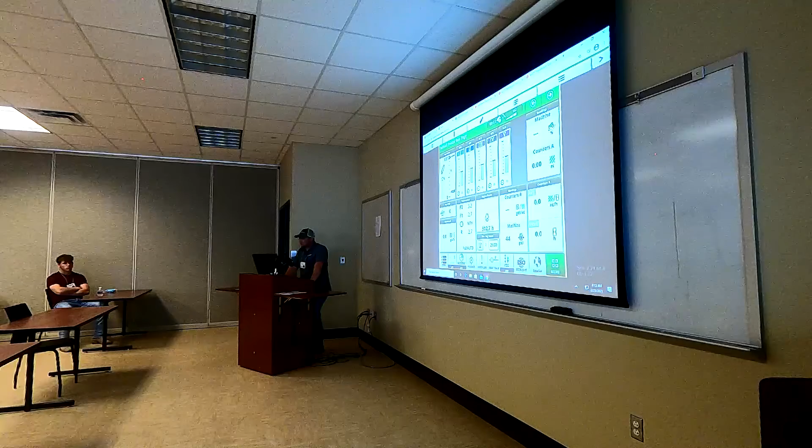So this is going to be our main run screen, and this is what you're typically going to see. This is completely customizable - you can change any of this layout, different readings you want to see, counters, all that can be customized in the layout manager, and we'll discuss that a little while later. So this is our main screen.

This is your quick little toolbar down here, and again, you can completely set this up to see whatever you need handy at your fingertips.

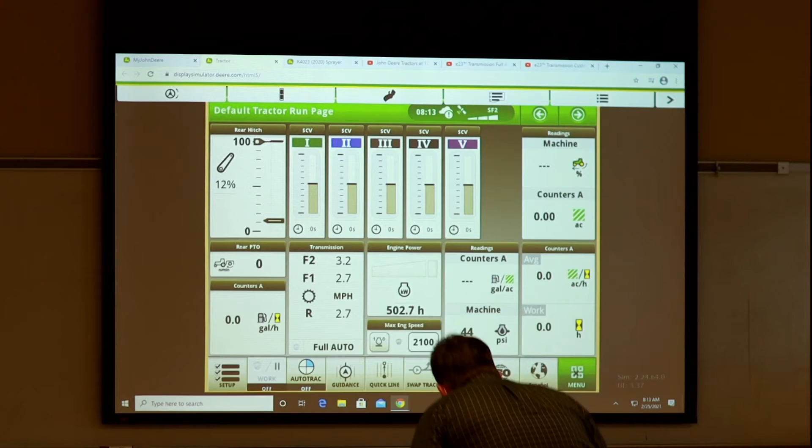Going into our menu here, this is going to be all of our typical machine settings, and this is what we're going to be covering in this presentation today.

Audio, of course, that's all going to be right at your fingertips. You don't have to reach up to your radio anymore - it's all right here.

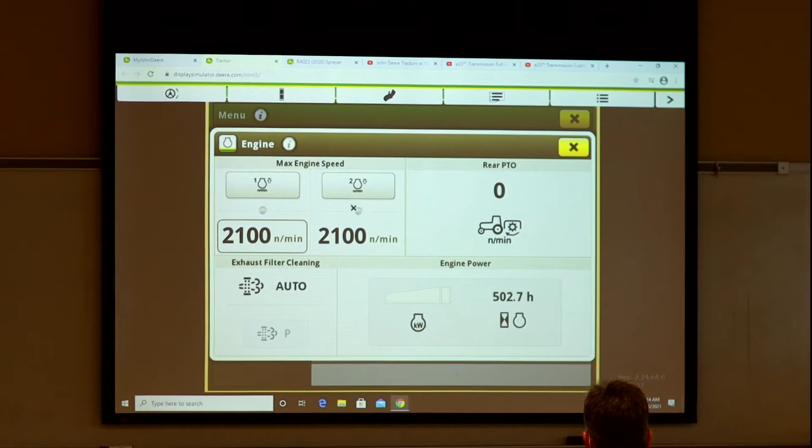Engine settings - this is where we can go in and set upper engine limit, basically a field cruise. You can set up to 2 of these, 1 and 2, and adjust your RPM range however you like, and have both of those preset. Those can be turned on and off on your throttle right here.

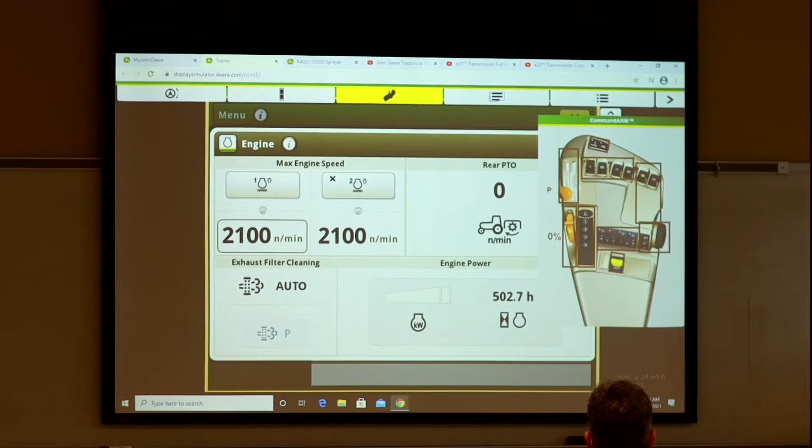So we'll go back. HVAC, all your air conditioning settings is included in this as well. Lights - all of your lights, you can select what lights you want on in each position.

1, 2, high beams, number 2, and you can also set a delay. The typical delay default is 90 seconds. We can set them at instant off when you get out of that tractor cab. I think it goes up to 5 minutes, giving you enough time to shut down the tractor, close up your shop, lock the gate, whatever, and have a little light to get in your truck and head home.

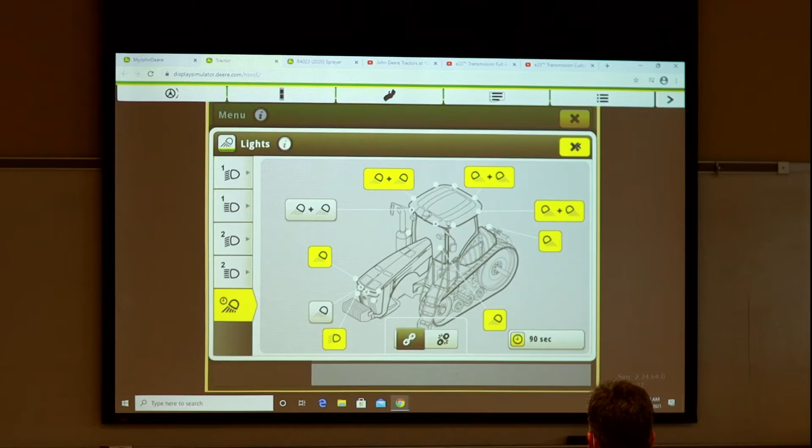Maintenance and calibrations - I'll get into this a little more. I've got a sprayer simulator I'll pull up. There's not a whole lot in here on the tractor side, but when you get into the sprayers and combines, this is loaded, and this is where all your calibrations will be stored.

Service intervals as well - you can now customize your service intervals. Instead of the light coming on telling you 50 hours of service, you can actually go in and add service intervals, name them however you like, and also put in notes. So say at 2,000 hours you changed the oil in your front axle and your hubs, you can make a note in there, and it stores it in the computer. So keeping a notebook inside the armrest - all that can be customized and set up inside here instead.

Phone for the Bluetooth radio, that's accessed through the Gen 4 display as well. PTO settings - not a whole lot in here.

Something I did want to point out, let's go to our transmission settings. This is an IVT transmission that this simulator is set up on. We do have a 6230R and an 8230R set up outside - I think the 8R has a power shift transmission, but the 6R does have an IVT transmission. So this is your typical transmission layout for an IVT transmission. I think most everyone's familiar with that - we've had them for several years now.

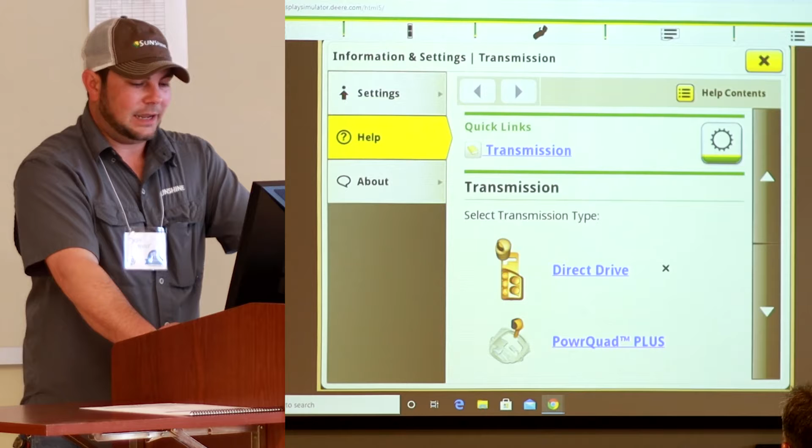This i information is always going to be a direct link to the operator's manual. So if you ever have any question about what type of setting we're looking at, that can always be accessed right here, so you don't have to reach behind the seat and get your operator's manual out.

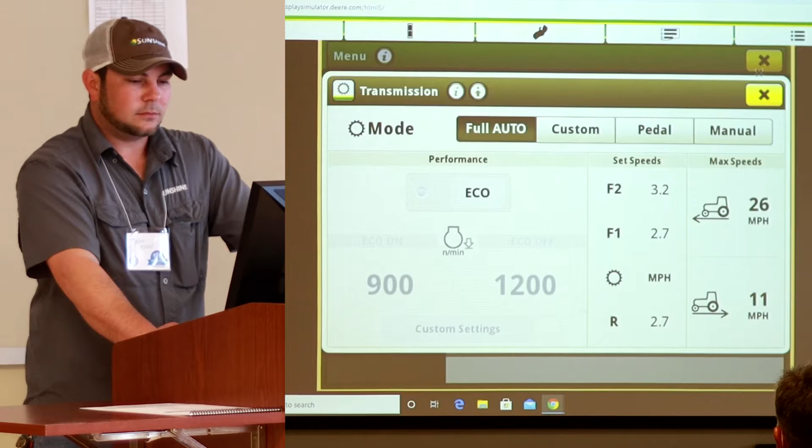Rear hitch settings - again we have some advanced settings in here, but this is basically all your settings. You can set your upper limit for your hitch with the push of a button, that can be adjusted, or adjusted with the thumb wheel on your armrest. Hitch drop rate - how fast the hitch lowers. We don't want that tool slamming into the ground, so we can adjust that here, along with the raise rate. That can all be adjusted as well, and our low depth adjustment.

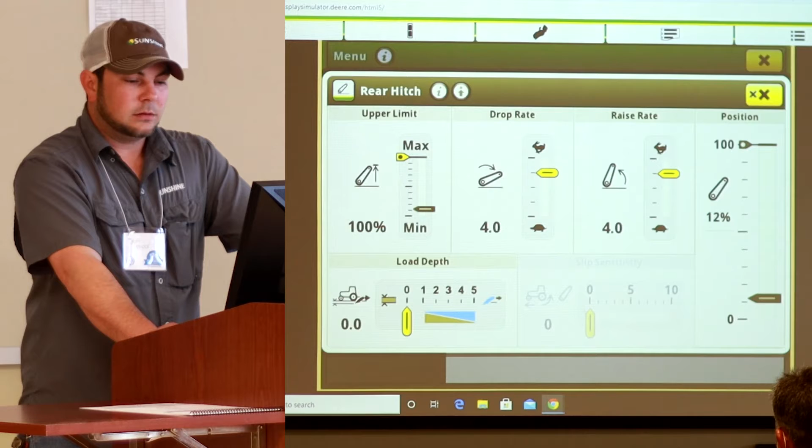So here we'll move on to our SCVs. There's a little bit more here. We can adjust all of the flow and the detent times of our SCVs. With a simple push of a button, our flow is defaulted to 5, but we can take that up or down however we see fit to fine tune the fold and unfold, raise, lower, whatever we have attached to those SCVs. Also detent times - if it takes 10 seconds to unfold our disc, we can set that at 10 seconds.

And that's all it takes. We hit that detent and it's going to fold for 10 seconds and then it's going to relieve, so we don't have to sit there and hold that button constantly.

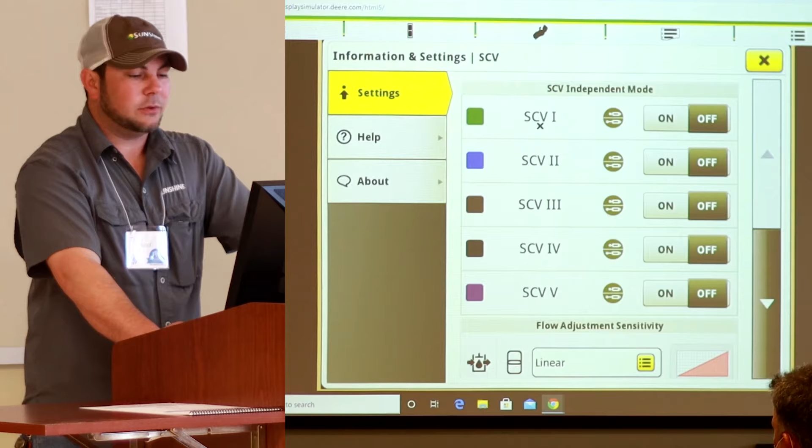We can also, in these advanced settings, split flow. So if we wanted to raise faster or lower slower, we can do that. We can go into SCV independent mode - say SCV number 3, when we want to split the flow on it, we can turn this on. Now when we go to our SCV number 3, we can adjust it both ways.

So if we want the extend to speed up a little bit, we want full flow on extend, and then on the retract side we want to slow that down a little bit, we can adjust that here. So you don't have to compromise with having the same speed for extend and retract functions - we can fine tune those however we see fit.

Steering - this simulator is set up for a track tractor, so generally on a wheel tractor you're not going to have this, but this is our steering sensitivity for a track tractor.

Another feature I wanted to point out that I've been wishing we could have for years - we have a lot of Hispanic operators in the area. We now have the ability to set a default secondary language, and I customized that and added it to the toolbar here. So this is how it's set up - we'll go into our main system here, and this is all of the settings for the Gen 4. This is not machine settings, this is all Gen 4 settings.

So we'll go to our language and units, and language - we're actively in English and the alternate is in Spanish. I won't do it for the sake of time, but with a simple press of this button, the display will power down, reboot, and when it powers back up, everything's going to be in Spanish.

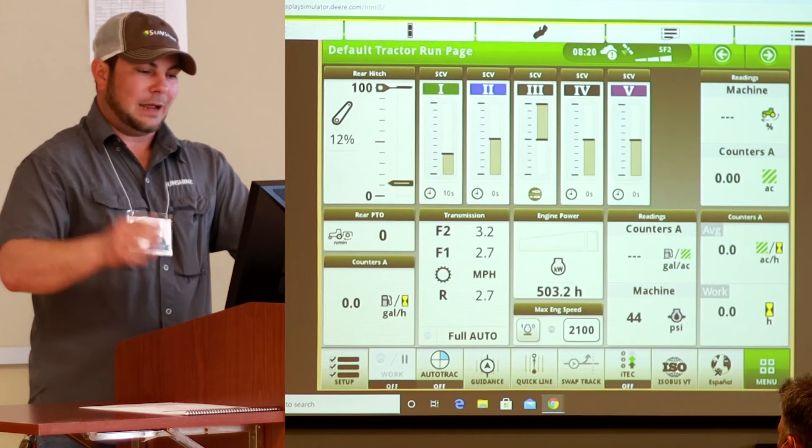That's beneficial because a lot of times these operators aren't stupid, but sometimes they don't understand. We get warranty tractors in, a brand new tractor with a code, and the air conditioner's not working. The guy just doesn't know what the code actually means, or if he can continue running the tractor or needs to stop it. So I think that'll help with a little more understanding of these machines.

I guess we'll go over Layout Manager next. So again, we went through most of all our machine settings here.

Applications, this is mostly all your AMS type stuff, and Patrick and Steven are going to go over some of these later today. I won't get into a whole lot here, but what I do want to discuss is iTEC, which is intelligent something control.

Basically, we can set different functions, up to 15 different ones: hitch, SCV, transmission functions, gear up, speed up. We can set all that with the push of a button. So when you get to the headland, instead of turning your SCV off and raising your hitch manually, we can set all that with one button. Throttle down, speed up, we can set all that, and we've got several different presets here. We'll get into that in just a minute.

Layout Manager - this is how you can customize all of your default run pages. Shortcut bars, as I mentioned before, we'll look at that, and this is where I actually added that language. You can take anything off here, you can add whatever you want to see that'll be on this toolbar constantly.

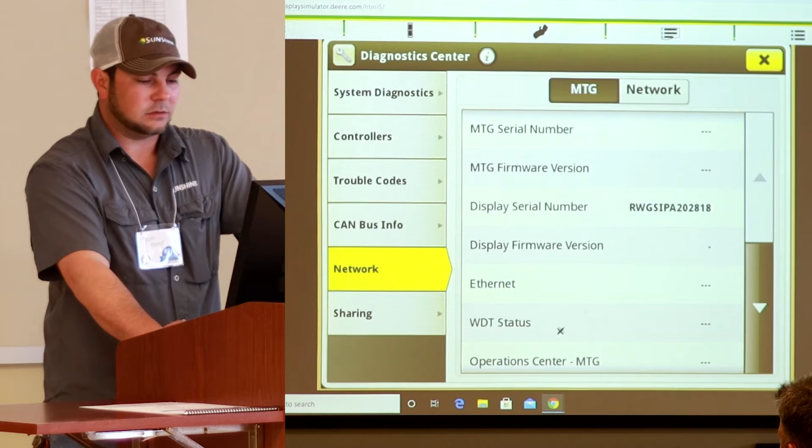Question: that being the case, and going back to the trouble code, if we go in and clear codes while it's communicating with JD Link, whatever features it has hooked up, will those codes still be stored on our history on JD Link?

In JD Link, yes sir, that history will still be there. So we can clear these codes and it will still show that history. Again, so here's what we've got active currently on a machine, but yeah, that history will stay in JD Link for you to go back and look at.

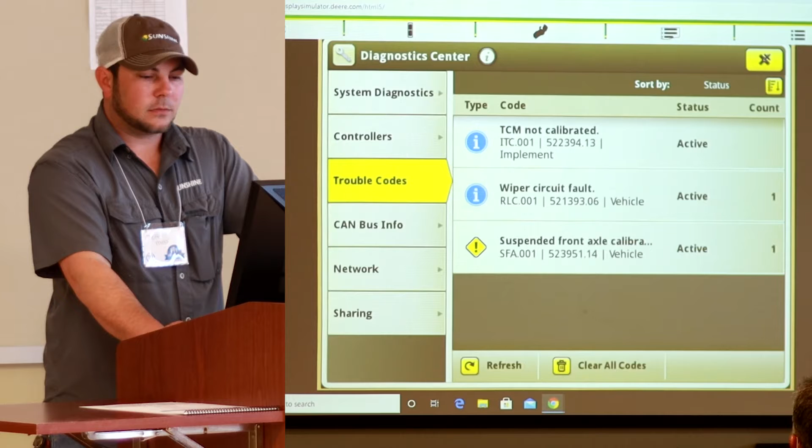Going back to iTEC, we'll set up an iTEC sequence real quick and show you what that looks like in real time. So here's our iTEC setup page.

First we're going to turn our master switch on, and we can name these. We'll call this planter number 1. For sequence number 1, we can add a step. When we are entering the block, we want to speed up, so we're going to plant at 9 miles an hour.

We want to add a step. What else are we going to do? Let's raise our engine speed, so we're going to go to 1800 RPMs. We're going to add another step.

We're going to lower our rear hitch, and we'll extend our SCVs. We'll lower our wings, say we got a stack fold. These are offset, so how many feet before or after that line this function will actually be started. Let's see if we want to add anything else. Say we got downforce, so for SCV number 2, we're going to run that in constant.

Extend, okay. Alright, so that sequence is now set up as number 1. We'll name that planter lower. We can save that, and now for number 2, that's going to be exiting the block.

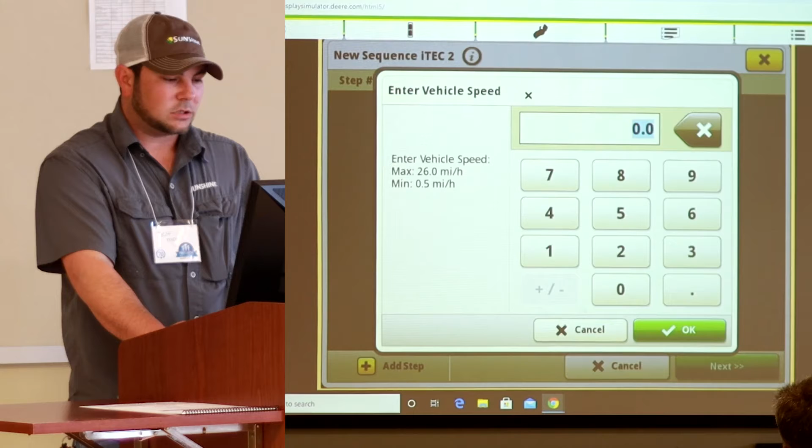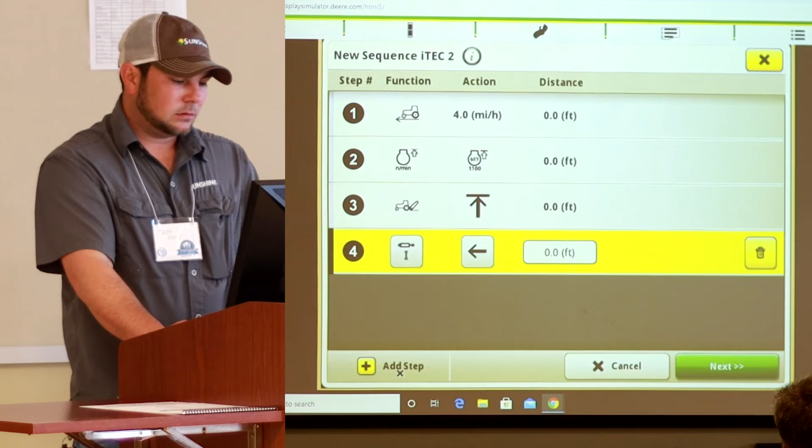So we want to slow down from 9 mile an hour to, let's see, 4 mile an hour to make our headland turn. Max engine speed, we're going to go from 1800, let's go down to 1100, making that turn. Hitch, we're going to raise our hitch coming out of the block. Number 1 SCV, we're going to retract those to raise our wings. And number 2, we'll retract and we'll turn that downforce off.

So we'll call this planter raise. Oh, let me click OK. The simulator is very accurate, but sometimes it's got some hiccups. Okay, so that's saved as our iTEC number 2 sequence, and it's on.

So we'll go back to our main run page here and try to simulate that. We can see our little green light here showing us that iTEC is on and active. Now let's go to our guidance and we'll set an AB line. Set track, make a new track, AB method. We'll call that track number 1.

We'll set our A point. Now we need to drive at least 10 feet, so we will put our tractor in gear here. So we're moving now. Let's throttle up.

And now we've drove enough, we can set our B point. So now we've got a line here. We're enabled, we're ready to AutoTrac. This is our AutoTrac resume button. So we'll do that now and we should be auto tracking on that line. So here, we're auto tracking on that line now, driving through the field.

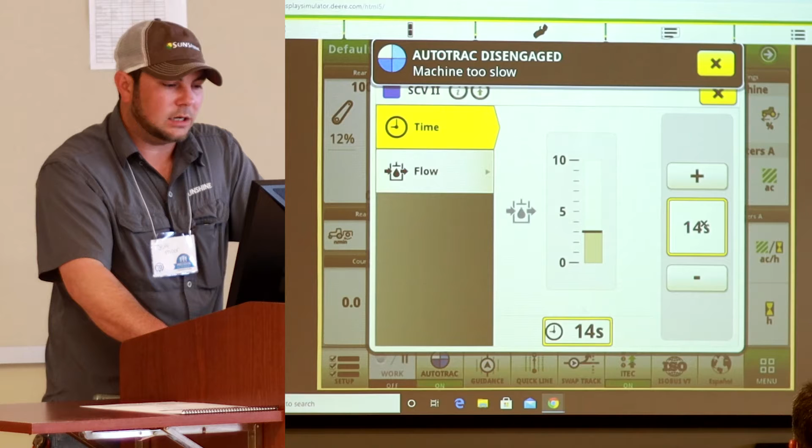And for number 2, we're going to turn that flow down to 3. And running downforce, we're going to want to run that in constant. Should be able to click inside this box here. Okay, so there's our constant. Now we got constant flow on that SCV number 2 when it's engaged.

Hitch, our upper limit, we don't need that much upper limit. We don't need to pick the hitch all the way up, just enough to clear the ground on our turn. Set that at 80%. And then our lower limit, go back to our armrest. We'll set our lower limit at 30%.

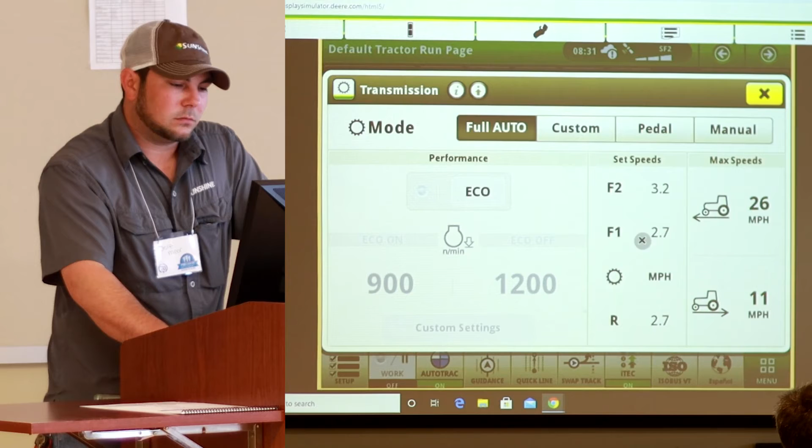Now we've got that set. Alright, so go back to our guidance page. Why are we not moving? I don't know why we're not moving. Okay, well, technical difficulties. So anyways, we'll go back and I guess we can still probably perform that function.

So number 1 SCV, number 2, we're going to put that in constant flow. Let's go ahead and turn that on. Do our armrest. We want to put that in detent. Okay, so we're running constant flow on our downforce for our planter. And with the push of this button here, number 1, so now we're lowering in the field. It's not going to work because we're not moving. I don't know what the deal is here.

Back to our guidance. Well, I don't know, I guess we'll skip over that part. We can look at this a little closer when we get out to the machines, give you a better live view of what actually happens there.

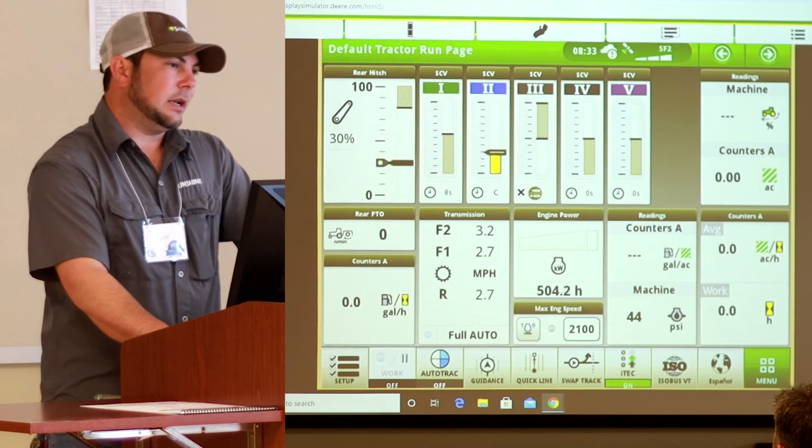We had that on the 20 series and 30 series, and a lot of people didn't use it, it was so difficult to set up. But now you can set all that sequence up, and I think you can record up to 15 or 20 different functions. So when you go hook up your planter, it's recorded in there from last year, you don't have to go and re-record or resync that again. It's going to be in there from last year, and you just tell it how many feet you want it to happen on.

Okay, so we finally got that off our screen here, so now we'll go into our system diagnostic center. This is system diagnostics. Like I mentioned earlier, we don't have much of anything on our tractor because there's not a whole lot of diagnostics we can do on that, but on a sprayer or combine there's tons of information in here.

As a technician, this is where we typically go. We're going to walk around the machine and see if we see anything obvious, pulled out, ripped out, oil spewing out. And if it's an electrical problem, this can tell us a lot without hooking the computer up. We'll check the codes and see what's active.

So we'll go into our boom system here, and at first it gives us a status report. We've got a green light, the center frame is calibrated, the tilt valve is calibrated, all that's good to go. Now we'll go into our switch readings: the boom floor switch is off, left tilt up, left tilt down, center frame raise. Say our center frame is not wanting to move up and down.

Let's get this over here, we can do a quick check. We can pull this up and see that switch status change as we press and lower that switch. That'll eliminate a lot of things right off the bat. So if we go in here and this doesn't make a change, then we know we've got an issue either with our armrest or a multifunction handle. Something is not working, the computer is not seeing that we're pressing that switch.

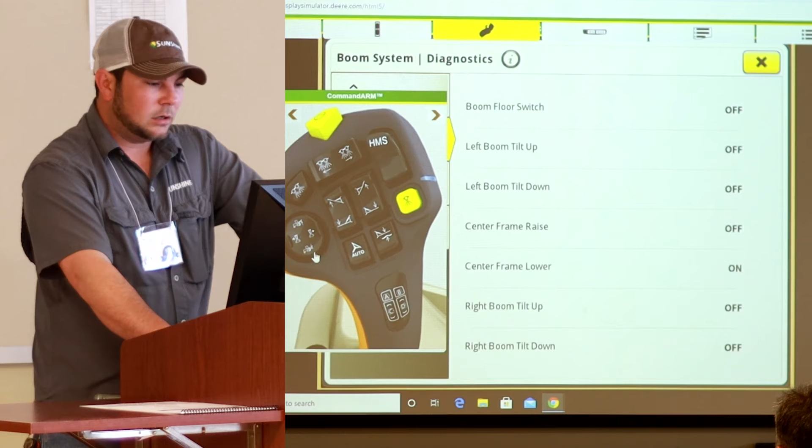Also inside here, sensor readings. Voltage is our return to height sensor. This is the calibrated value, calibrated up, calibrated down value, and this is our actual voltage. Left wing fold, these are the left wing fold and right wing fold sensors, both open. If we do have BoomTrac, this is our target height, and we can see what we would be off canopy and off the ground.

Just got to wait it out. And while that's hanging up, I'll just point out this simulator here.

This can be found at My John Deere. So if anybody has a current My John Deere account — and this is what that looks like — that's where you would access all your parts advisory, StellarSupport, operations center, JD Link, but now the simulator is incorporated in there too. This is all accessed again through My John Deere, and this is what that looks like.

Yes, I think it does have a link to parts. Yeah, parts, JD Link, Operations Center, and the Command Center simulator is in there as well.

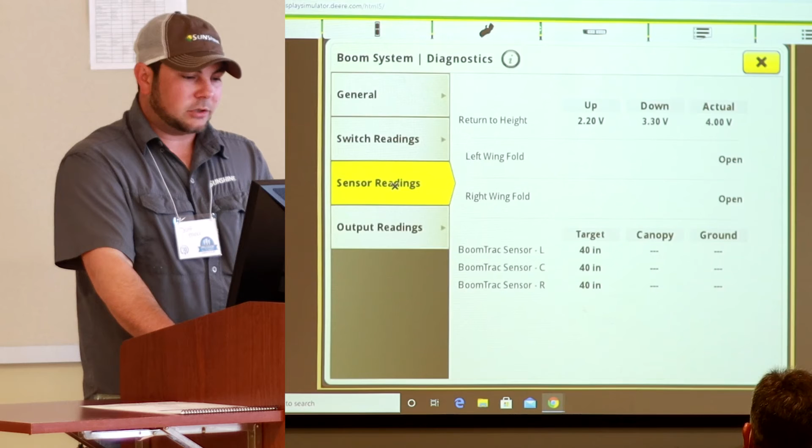See if we can move now. Okay, so sensor readings. There we go. All right, so output readings. It's not going to let you move far if you don't, that's for sure.

Even milliamps, output milliamps on different solenoids. So if we've got a short, we can actually see a lot of that right here. Again, as a technician, this is where we start. Without hooking up a computer, we can go in here and kind of isolate the problem to either the front end of the machine or the back end of the machine, and give us a good starting point.

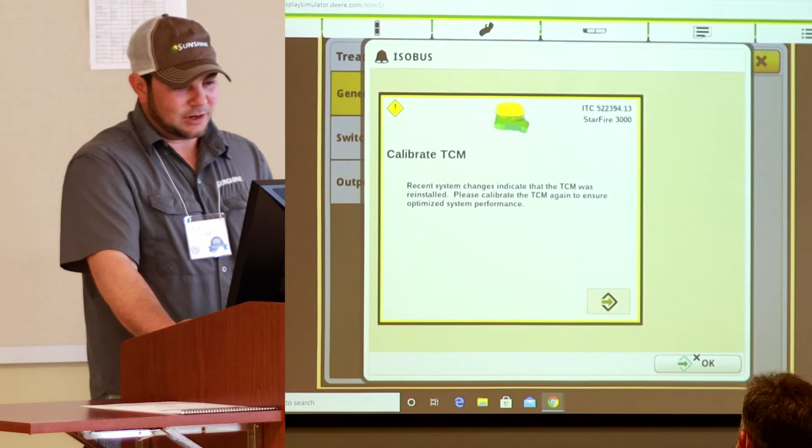Go back, cab controls, command arm controls, solution, tread adjust. Say our tread adjust - I guess I should have calibrated the TCM. But tread adjust switches, you know, sometimes those things will get hung up on us.

It's probably not calibrated, that's the reason we don't have a green light here. Tread in, tread out - say one of those is hung up on us and we're not sure if it's just actually physically hung up or if we've got a hydraulic or an electrical problem.

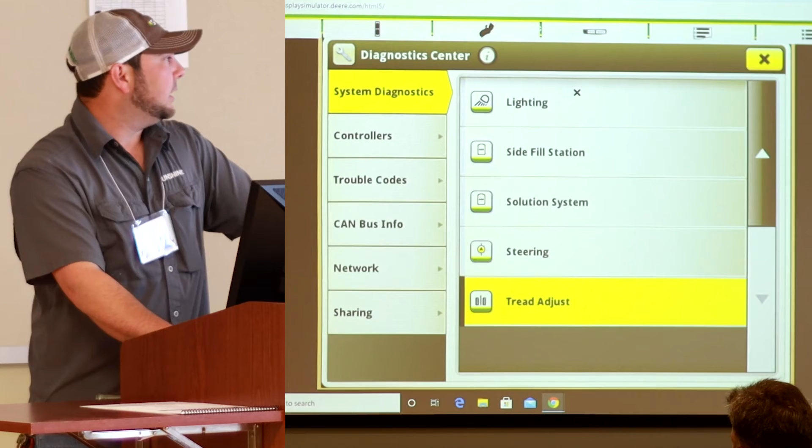So that's it, I guess, as far as diagnostics. Like I said, you're not going to have a whole lot in here on the tractors, but when you get into your sprayers and combines, there really is some good information in here. Let's see what our time looks like - I guess we've got a few minutes.

One of the other things I wanted to bring up and discuss a little bit is our E23 transmission. This is the newest transmission from John Deere, and essentially it's a hybrid between a typical power shift and the IVT. You still do have that physical gear, but you can fine-tune your speed within that gear, giving us the ability to customize it to fine-tune our speed and what type of work with the fuel savings.

So we've got a couple videos here. This first one is going to be in full auto, which is going to act more as an IVT, and then we can go to custom, where you can fine-tune your speeds within that, your engine speeds within that. In manual mode - we won't show a video with that - but essentially you've got just a power shift. You can set your throttle how you want it, pick your gear and go. So this is going to be our auto.

This video explains the functionality and features of the John Deere E23 transmission in full auto mode, where the operator sets a desired ground speed and the tractor determines the most efficient way to maintain that speed. In full auto mode, the modules available to the operator are max speeds and set speeds.

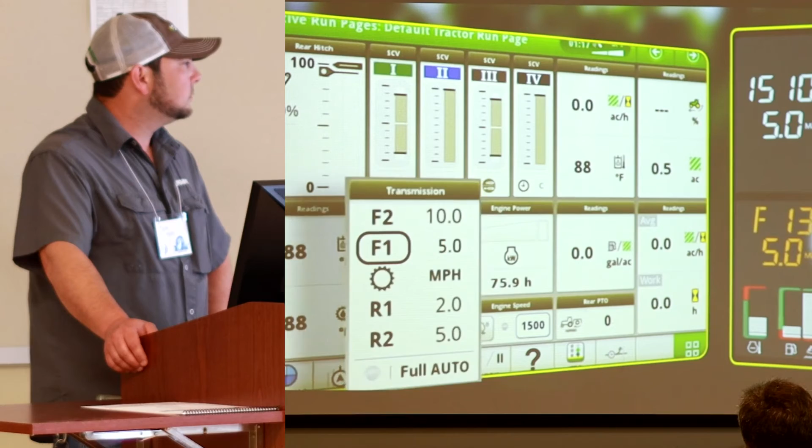When a set speed button has been activated, the efficiency manager will shift gears and change the engine speed to reach the selected ground speed. An outline box will appear on the transmission module to show which speed is active, and the efficiency manager indicator light will be visible on the corner post display.

Maximum throttle position is required to efficiently reach the desired ground speed. Engine RPMs will increase as the tractor makes automatic adjustments under changing loads. The set speed adjusting wheel can adjust the set speed value while the tractor is in gear.

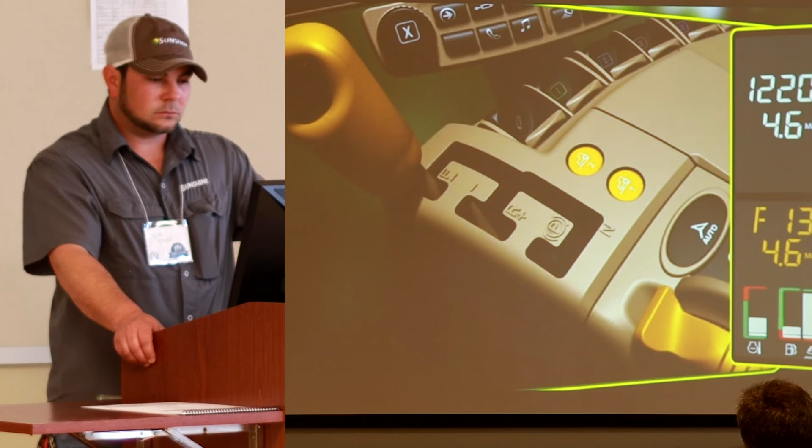Bumping the transmission control lever forward or backward deactivates the set speeds. Ground speed will then increase or decrease. When shifting between forward and reverse in full auto, the tractor will return to its last known ground speed.

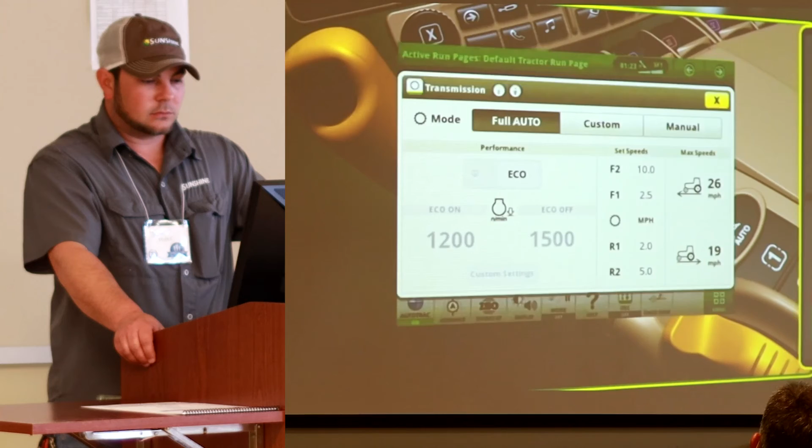Not all modules are available to the operator in full auto mode. Additional John Deere videos are available on how to set up and operate the other transmission modes.

Essentially, in auto mode, the controller is going to select your gear and engine RPM to maintain that ground speed. So as load applies, it's going to gear down, throttle up as needed. You really don't have any customization over that until we get into a custom mode.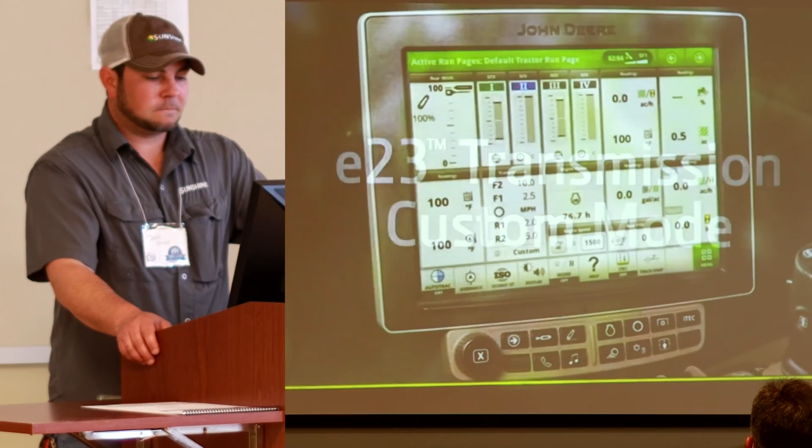John Deere E23 transmission in custom mode. Custom mode operates just like full auto mode, but allows for operator customization. In custom mode, the operator sets a desired ground speed, while the tractor determines the most efficient way to maintain that speed. The efficiency manager is always on, meaning the tractor will automatically control the throttle to change engine RPMs. It will upshift or downshift gears to maintain the operator's desired ground speed based on current engine load.

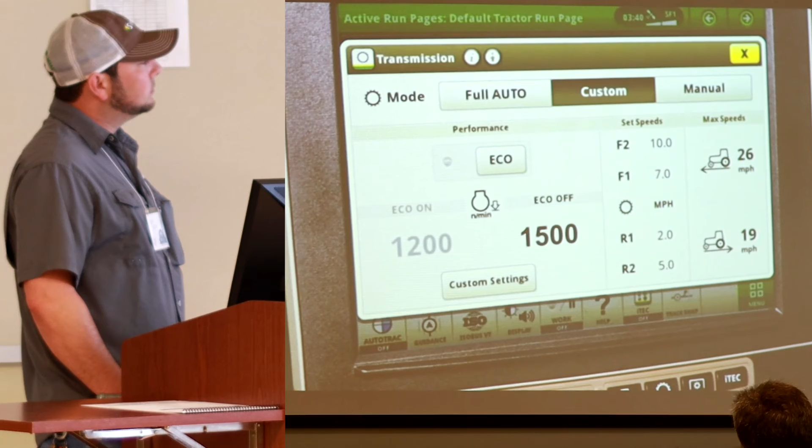The performance module is available in this mode to allow the operator to set two minimum engine operating speeds, displayed as Eco On and Eco Off. For example, Eco allows the operator to set a minimum engine speed for fieldwork conditions and another minimum engine speed for transport. Take a planting application with varying field conditions, which may require the tractor to maintain a higher engine speed. With the transmission in custom mode, a higher minimum RPM can be set based on the operator's preference to overcome headland turns, slopes, or soil conditions.

With the Eco function off, select the Eco Off module. In this example, field conditions require a higher engine speed, so set the Eco Off to 1700 RPMs. Now, select the Eco soft key to toggle Eco Performance on. Select the Eco On module to adjust minimum engine speed. In this example, lower RPMs can be used for transport, so set the Eco On to 900 RPMs. These Eco settings will ensure that the tractor maintains a set minimum engine speed for use in specific applications.

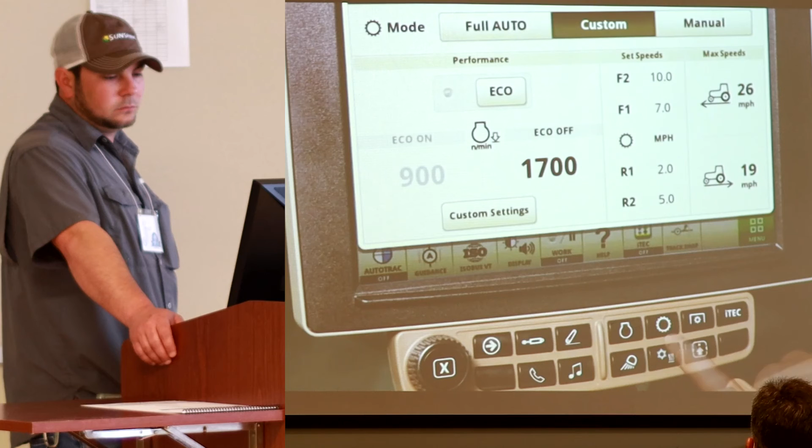From the command arm throttle control, Eco Performance can be toggled on or off. The indicator light on the command center will show when Eco On is active. Also in the performance module, the operator can select custom settings to tailor the transmission to a specific application.

Custom settings allow the operator to adjust engine speed droop, along with PTO, hitch, and SCV load anticipation settings. The auto shift engine speed droop sets the permissible droop in engine speed under a load before the efficiency manager automatically downshifts. A lower percent means the transmission downshifts earlier, and a higher percent means the transmission downshifts later.

Different values may be entered for operation, either PTO on or PTO off. Lower droop percentages are more responsive to load changes and result in more constant engine speeds. Higher droop percentages are less responsive to load changes and result in wider engine speed ranges.

The load anticipation features allow the transmission to predict loads when PTO, hitch, or SCV are in use. When these features are toggled on, load anticipation can both downshift the transmission and increase engine speed to maintain the operator's desired ground speed.

In custom mode, the max speeds can be adjusted, and set speeds can be viewed on both the transmission and run pages, although they can only be adjusted using the set speed adjusting wheel on the transmission control lever.

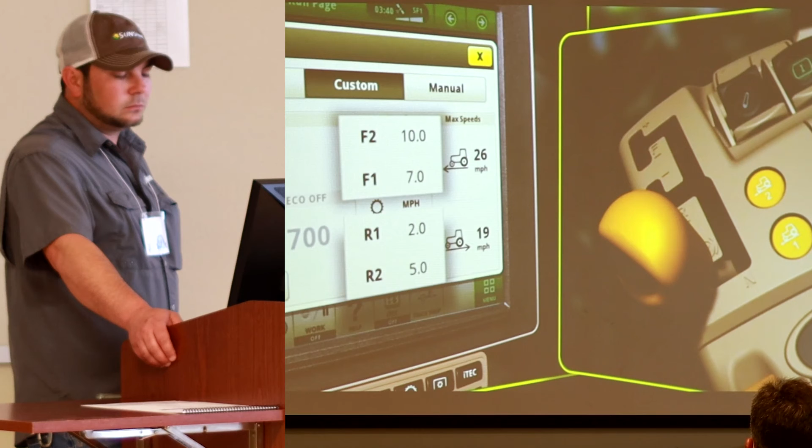Operators have the ability to set 2 separate programmable ground speeds in forward and reverse. These set speeds are activated by pushing the set speed buttons on the command arm. Since custom mode is speed-based, the set speeds function as they would in full auto mode.

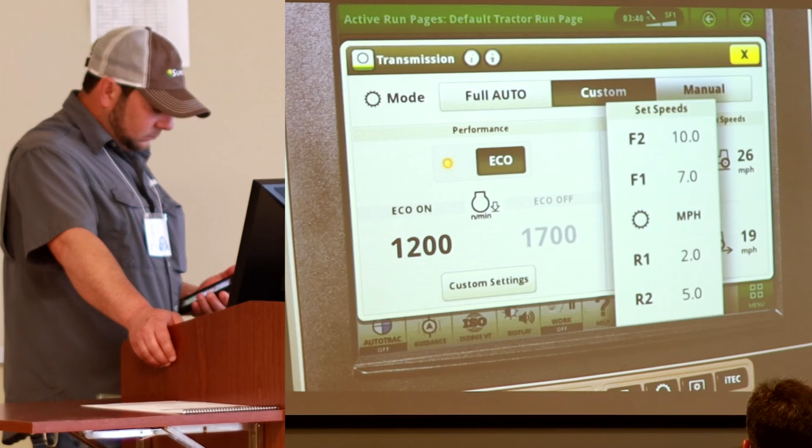Okay, so there are a lot more, you do a lot more customizing in the custom mode. So really to fine tune this transmission, that's where we're going to be able to do that at. And that droop setting is a big one.

We don't want to burn any more fuel than necessary, but if you do have a wet spot in the field by a drain or something, we can fine tune that droop to where - I guess that was the complaint with a lot of the IVTs, is the power's not there when you necessarily need it. Well, this being that power shift function of a physical gear, it's going to downshift, and that droop setting is only going to let your engine RPM drop so much, a certain percentage, before it downshifts and gives you that extra power.

So I guess that's it. Has anyone got any questions? I know we're running a little short on time.

Going back to the tractor home screen, you know how the default page comes up. I have a 6155 RH. The control setup page with the iTEC and the SCVs are coming up as my first home page, and I had to get out to see this. I had 2 tractors doing that. One did reboot the computer system and it did fine. I was seeing if maybe we can get out of that without rebooting the computer system.

You should, when you go into Layout Manager, can you change that? Because this is your default run page, so whatever you have set as your run page should be what comes up when you start the tractor. Well, the computer iTEC, I know Philip tried to get in and he couldn't figure it out.